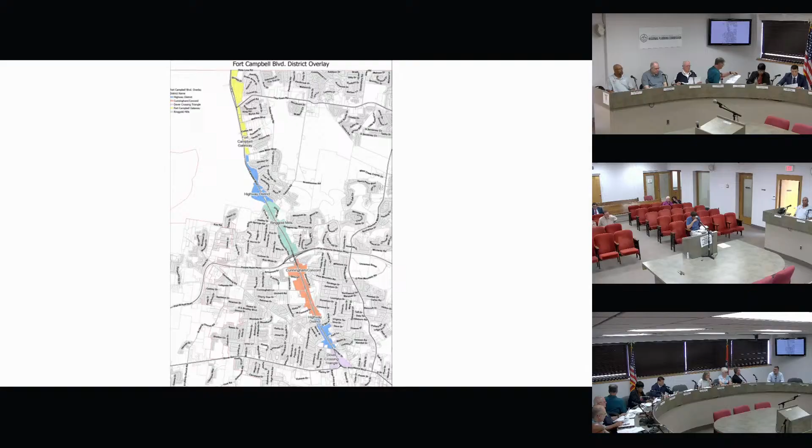On the next map, this is Tiny Town Road. We had to split it into two because it's a very long road east to west. Working at the top map from the left to the right is west to east. So again, a little bit of Gateway District there on Tiny Town Road up to Outlaw Field Road, or Airport Road. Highway District to the north, that's in the current Airport District. And then you have the Pembroke Tobacco in that area in brown. And then in the light green, you have residential districts. There are still several places along Tiny Town that have exclusive single-family or multifamily districts.

Then you work a little farther to the east, you get to the Barker's Mill sub-district with some highway and residential in between, and then an interchange district. I'm sorry, there's also an Allen Road district in between as well. And then there's an interchange district, which for this purpose operates just like a highway district, but in case we want to do anything in the future different, we called it interchange just to be different.

Even though the rules asked for stopping at Tiny Town Road, we felt it was a little short to just stop right there, so we took in all the C4 parcels up and down Trenton Road in that area to make it more contiguous. That's all the C4 commercial parcels in the bottom right of that map.

Just like with the Madison Street District, the highway sub-district, the residential sub-district, and now the interchange district reverts to base zoning for your setbacks, your height, your parking, your uses. The other districts, as you can see in the pages in front of you...

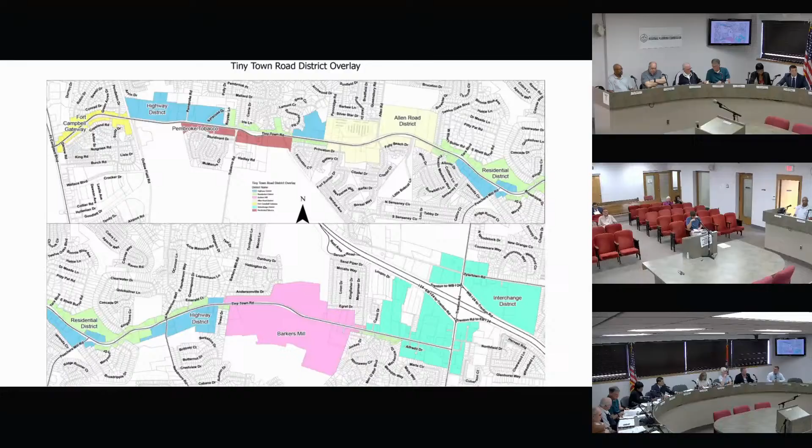What's our next slide? Do we just have the maps, or do we have all the boards too?

So staff, over the last month, we sent out almost 700 - right, almost 700? 550 to 600, okay, almost 600 letters to all the affected property owners with the maps attached, and said, for more information, go to the website or call us.

I don't know about Friday or Monday, I haven't checked in with you. Have we had many more calls Friday or Monday? We did field quite a few calls, though, about 2 to 3 weeks ago when the letters first went out. We've probably fielded about 50 total phone calls, and then we held 2 public information sessions, one at the airport and one at the Kleeman Rec Center last week on Tuesday and Wednesday night from 5 to 7. We had about another total of about 40, 45 folks show up to those combined events.

These are some examples of the boards we had. We had them blown up to 2 foot by 3 foot. Shows on the left there is the appropriate materials, so brick, metal, glass, and stone. And then on the right is accent materials that you can use. And this was just a good way - I think we're actually going to use these boards to make a manual out of, or a policy like document.

If you're going to develop in these districts, here's a style guide that you can use to give you some ideas. We may touch the pictures up a little bit, get a little more relevant pictures, but I think it was very, very well received so people could see what exactly the materials were and weren't.

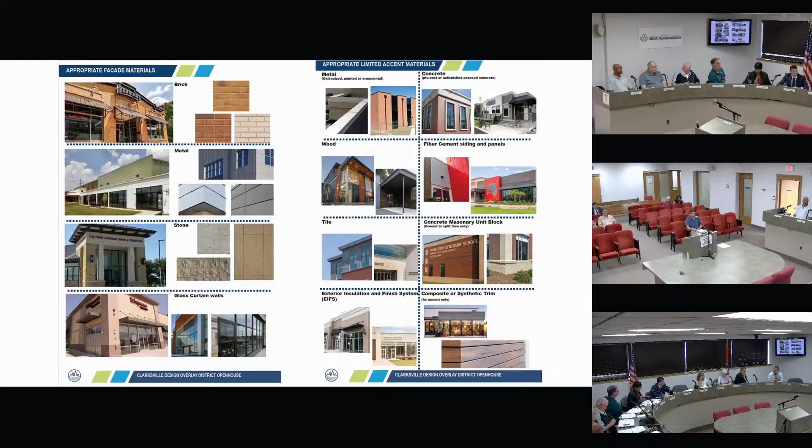I would say the majority of the questions we got were about signage, or sometimes the materials, like, do I have to do this now? And I'll go over those in a minute.

On the signage, we did include inflatables this time, just to be very clear. We do believe they're currently regulated by the city's rules under temporary signage, but we just wanted to be very clear about that. Much like Madison Street currently, this will regulate electronic message centers, which are the ones with the words or the pictures on the LED screens.

We will likely come back in the next month or two if this passes at City Council, which I anticipate it does. We have been working on Madison Street until this kind of derailed us, to have a regulation allowing some electronic message centers, but not the exclusive sign. Right now in the city, you can have 80% of your sign be an electronic message center. We don't think that's appropriate for Madison Street, maybe 40 or 50%, and we've been working with the sign companies. We hit pause on that to see if this passes, and if not, we'll bring back language changing what we just adopted to allow some use of electronic message centers. But we didn't want to confuse one with the other at this time.

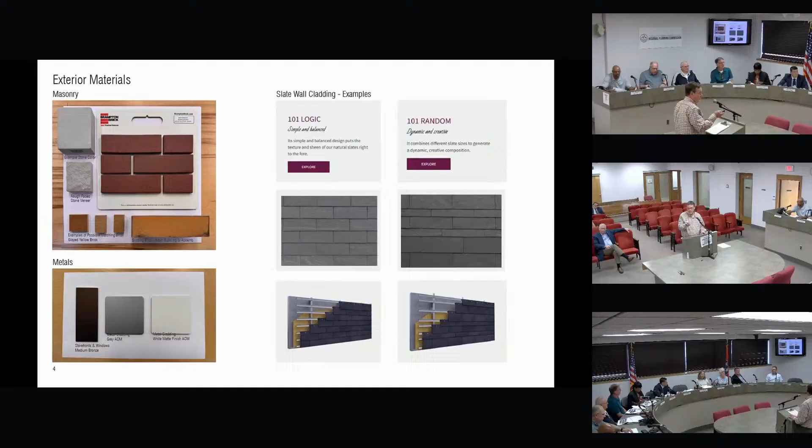The design team, let me see if I can show you something worth looking at here. We'll go to that one first. You've probably seen this, it's been out there for a while since we first introduced the initial design. So let me give you a little history of the project.

The design team includes a host of local and out-of-town architects, engineers, and specialty consultants. Gary, you may have seen several of us in front of your shop parading up and down the street, here and there. We used as many local engineers as we could: TTL Civil, K&S Structural Engineers here in town. H&A is a Tennessee-based mechanical, plumbing, and electrical firm.

But when the mayor said world-class, you have to look to world-class people to do the specialty design work. So we did some research, and I had a contact, and that contact panned out. We enlisted what we feel is a team of acousticians, theater consultants, AV and IT experts dedicated to theater design that is above any in the country. They do things all over the world. They did the Schermerhorn project, most of them did.

The teams changed, but this basic team did Schermerhorn. They did the Belmont Fisher Center. They did the Country Music Hall of Fame's round auditorium, which was very difficult because you're not supposed to design round auditoriums, since sound comes to the center point. So we feel really good about the team.

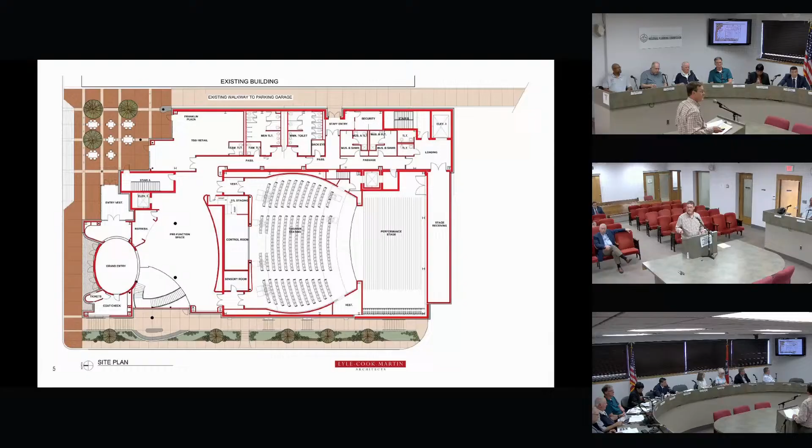So above this would be a balcony, and above all that is a top-level flexible auditorium I talked about, with a rooftop area that you see right there.

So this would be an event space, flexible space, black box theater, et cetera, with opportunities for public gatherings and dinners and so forth up there.

So in the development and working through the details of this thing with 18 different consultants and so forth, the first thing that became a problem was the floor-to-floor height between this main level auditorium and the second level auditorium, given there's a balcony in the middle.

The vertical floor-to-floor distances far exceed the current squatty floor-to-floor distances in the building. So the thought was, Brad's thought, because everybody kept saying, Brad, you're losing your mind, was to keep that wall and that wall and take everything else down and build back to it.

Well, then we started investigating further with the top masonry contractor in the state of Tennessee. We've got one of the best contractors in R.C. Matthews for this project we can find. They rebuilt some of those projects on 2nd Avenue after the bombing.

And they have a great local guy, Will Adams, who you played football with. But the late founder of the company, Mr. Matthews, built that building right there, which is really interesting. I don't know if you know that.

When they had the opportunity, they competed for it, and that was one reason they got their numbers where they needed to be, because they wanted to do this project very badly.

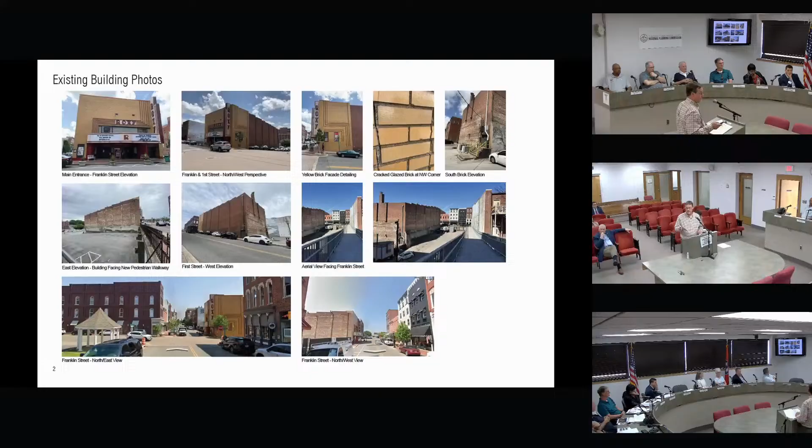So now the concept is, let me go back to my pretty drawing, to reconstruct the box with these same details, but we are dedicated to taking that marquee sign down and having it restored and put back in place. That's my compromise to myself. I mean, we just have to do that. And we feel very confident about that because it's been done before.

When the Coca-Cola sign hit it, or some company hit it in their truck, and they took it down, sent it to Memphis, they restored it and put it back. So it needs work again. We want to modernize that sign. In fact, what's really cool, if you walk right there and look up, you'll see the nameplate of the company that built the sign in the first place, and they're still in Memphis. There's like 5 of them now. I think all the grandkids got mad at the granddaddy and formed their own businesses. So that's my story behind the yellow glazed brick.

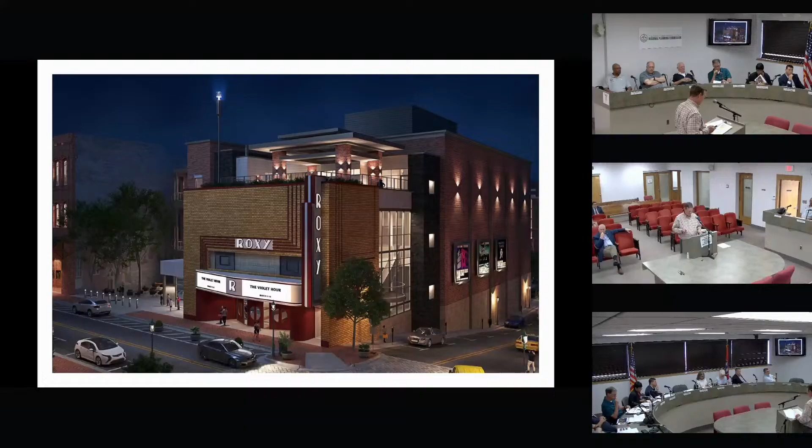And after months of the design team and the building team telling me, you have to think about this differently, Brad, I'm thinking about it differently now. But I feel good about it, because what we will come back with is a building that captures the spirit of the Art Deco facade and the marquee and the signage and so forth, but it'll be done in a modern way that will last more than 80 years.

In fact, the contractor and I were talking today. He said, Brad, this will be a 100-year building. And that's pretty unheard of right now. Typically, you don't build buildings more than 40 or 50 years until major overhauls have to occur.

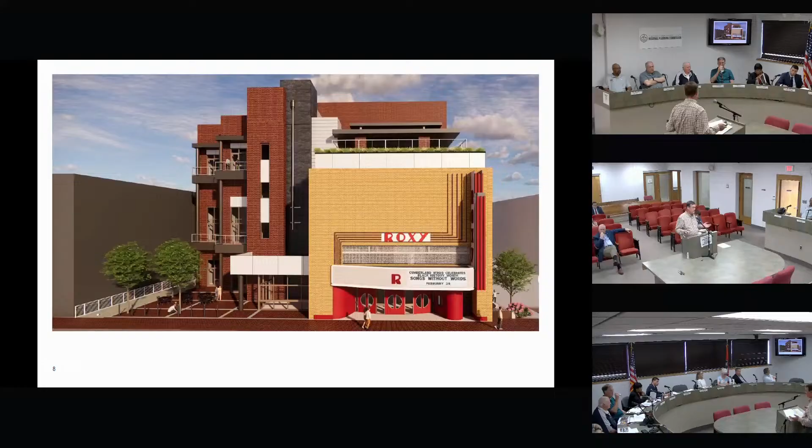Now, with this, I haven't spent a lot of time talking about what happens with it, but we plan on doing an outdoor pocket park that steps back toward this bridge that was just finished by the city, that will lead people from the parking garage into the plaza and into Franklin Street. It's just a great scenario. Down here will be the potential for a coffee shop, a little sandwich shop, whatever, during day use, as well as night use also.

The other thing is, we have the opportunity to still see a large swath of that mural on the Brenner building right there, which a lot of people ask me about. Are you hiding the mural? So just kind of working my way around it.

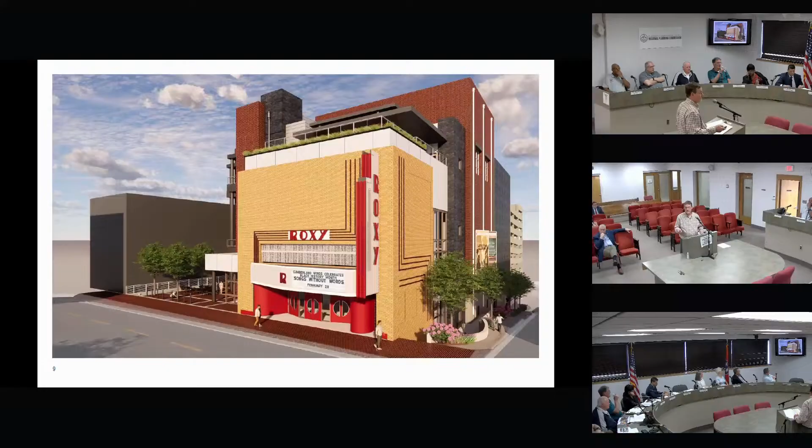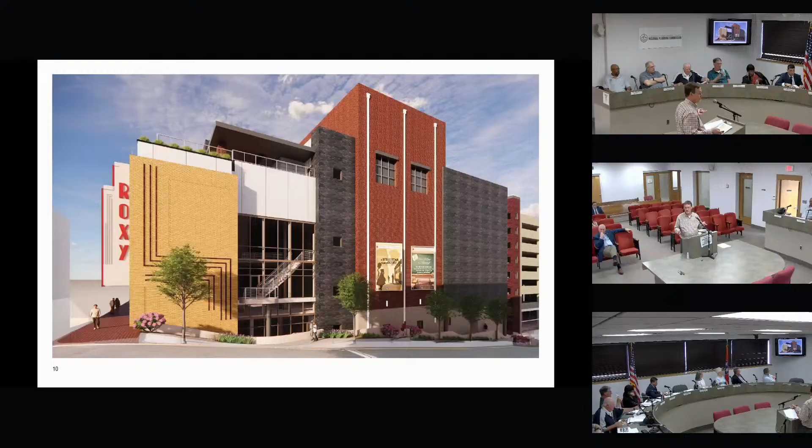Within this building as well, we will have some areas for city offices. The current Roxy will be a tenant. Their company will be a tenant. Their offices actually will be down here. This is First Street walking down the hill. So we've got a series of landscaping and steps and flats and steps and flats that get you down to the bottom.

A parallel project to this is redoing First Street, because right now there are all kinds of wacky utilities in the street. We think we know where everything is, but we really don't. And so that's a parallel project to it. There's also safety concerns with the other side of First Street along Bobby Roy Lance's building that will be addressed with this as well.

So you're seeing, back up here, that's the yellow brick box. This is the pre-function space within. It's glass. There'll be a big, sophisticated pull-down shade apparatus during western dropping sun times. Then that's the main body of the theater on the main floor, and then this jumps up above where that flexible studio theater is. And then all the back here, that's really just hiding the fly space and the back of house space.

There will be a truck dock area down here below with a little covered piece that jumps out over that as well. I think that's the last slide right there.

In conclusion, again, this is a career project for me. This is a really, really big honor, not for me, but for Tracy Miller, project manager, and my whole firm, and this whole 18-person team. So if you have any questions, I'd be glad to answer them, and Mayor Pitts can as well.

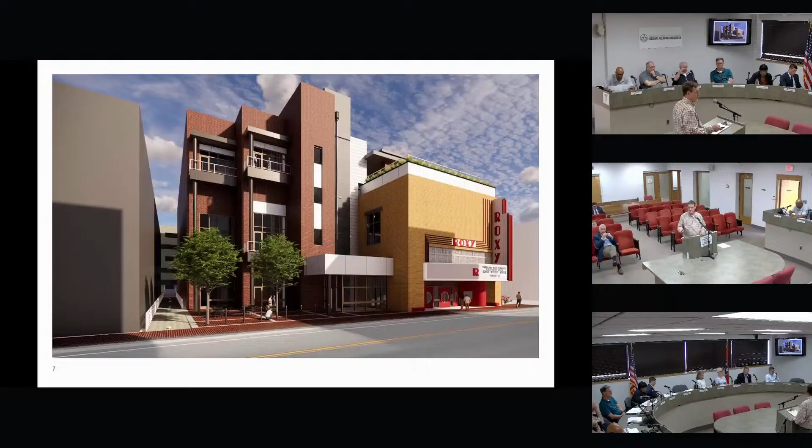Okay, all right, but you will be able to pull it—there is a spot right now, Gary, about right there. There's a little indention in the sidewalk, I believe. We're gonna make it bigger for that purpose. Not right in front of the door—we don't want cars in front of the door, but it will be like right in there, so they can. Okay, any other questions?

I got one. Go ahead. Just a couple of questions. My first one is, is it gonna be all brick, all the areas? And then my second question is, going down First Street, it looks like you've got a lot of landscaping, which is great, and the sidewalk—are you gonna narrow those driving lanes at all?

Great question. So right now you have parallel parking at a really steep slope, that goes away. The rationale behind that is it's too steep—right now doors flap and flop, but also you've got the new parking garage, so we're taking that away. The road will stay the same width, but now that island of sidewalk, steps, and landscaping, it's like 22 feet wide. It'll be very nice, a lot better than it is right now.

Is it gonna be all brick? The sidewalks, no, all the building? Like the dark part of the building? Most of it. Right now that is scheduled to be slate, and it's a rain screen system. I don't want the whole darn thing to just be a big monolith of brick.

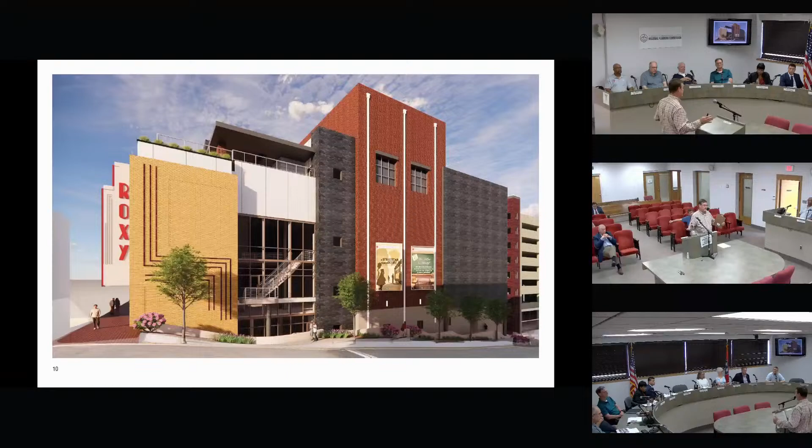We can continue to make money from that. One thing that we made the team, and I'm talking more than 18 people at this point, considering the owners, food service is really, really expensive. You know that. So if we were to have a full bore kitchen in this building, we just took it to another level, cost-wise and every other way. So what we're doing is a catering kitchen type of scenario in several places in the building to allow caterers to come in and do full sit-down dinners, but then they take everything away when they're done. So you're gonna have to still kind of set up a kitchen. Right, it's catering style.

Okay, thank you, that's it. Anybody have any other questions? Thank you, sir. Thank you, Mayor.